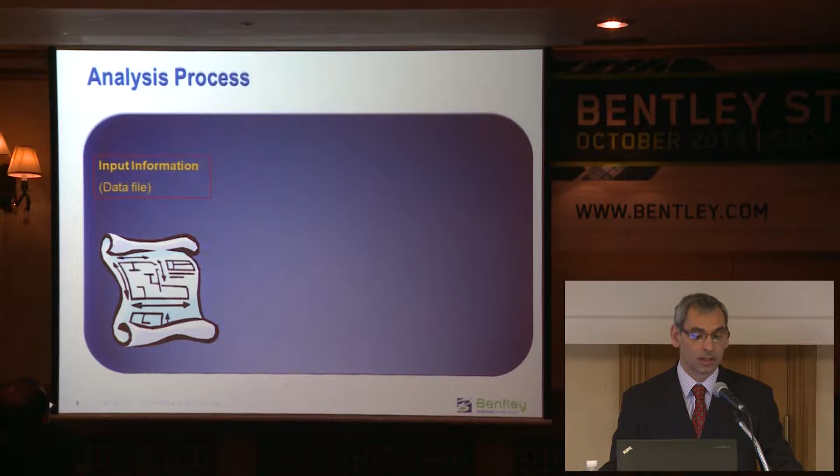So the first part of the process of performing structural analysis is obtaining the data and providing the data in a method that can be passed to an analysis process.

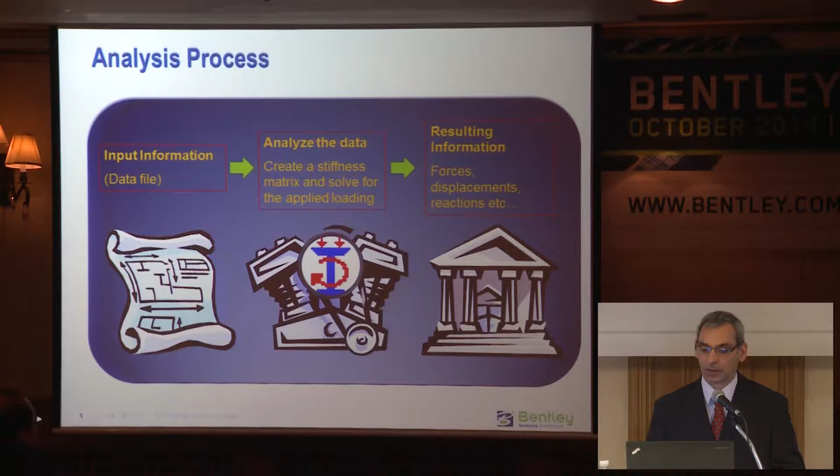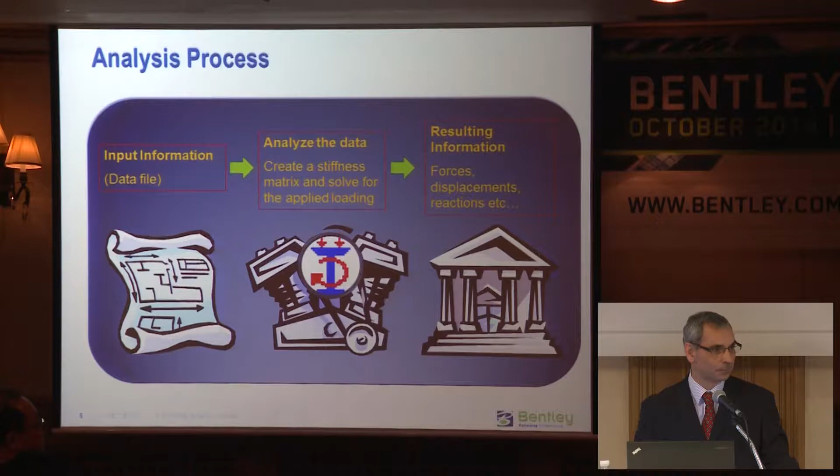With STAAD Pro, we provide this in a very user-friendly graphical interface.

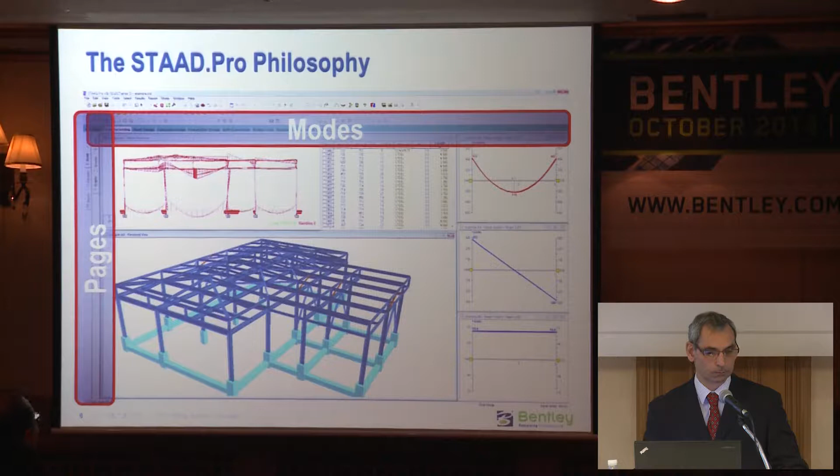However, a majority of our users still make use of the most fundamental part of STAAD Pro.

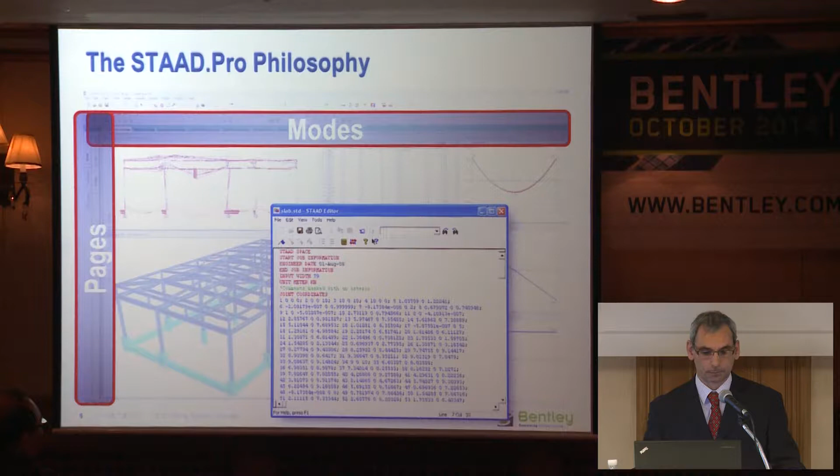However, we know the world is not a simple flow from start to end.

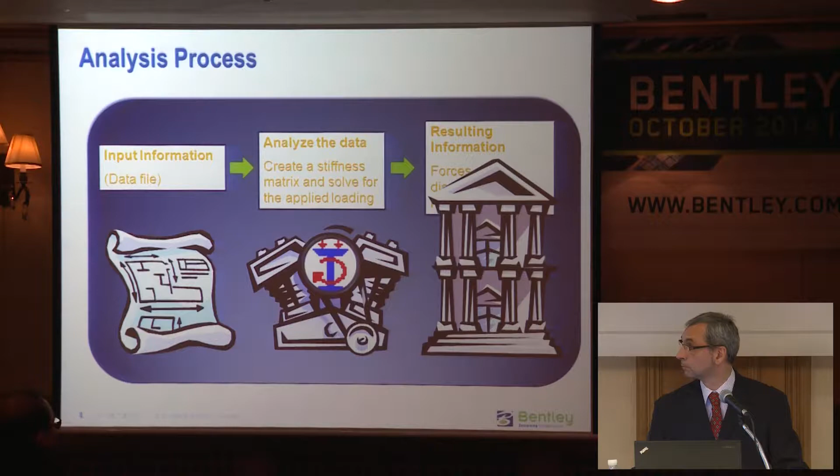In order for you to achieve your requirements, we provide the range of capabilities and entities that are fundamental to creating your models.

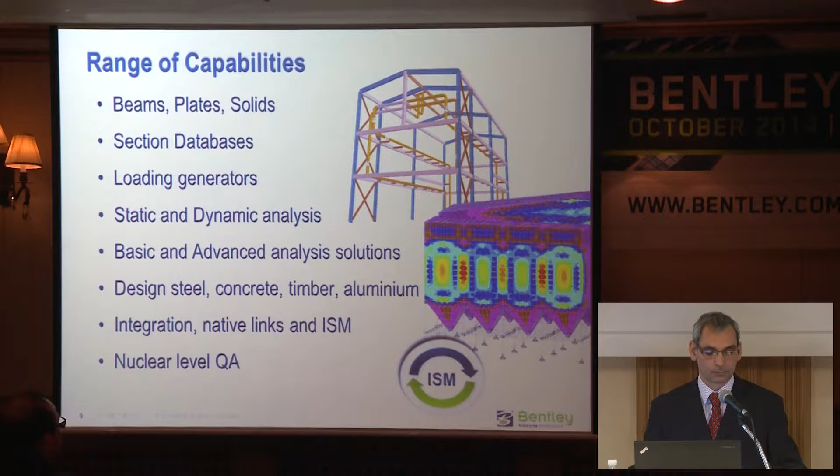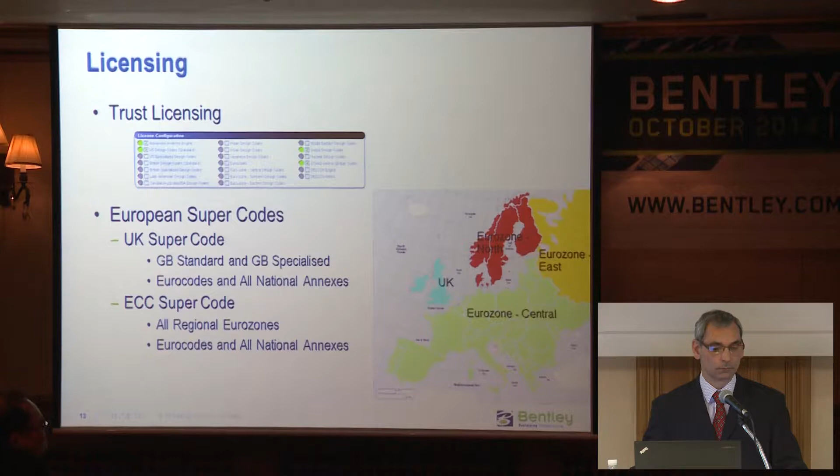This simplifies your requirements before you start the project and means you can be productive as and when you need to be.

So moving on to the technical capabilities that have been delivered with Select Series 5.

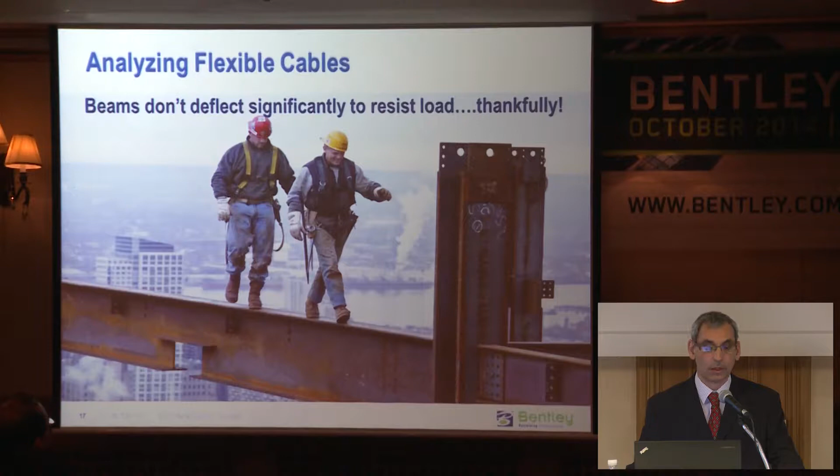However, if we start looking at cables, the structure is becoming more complex.

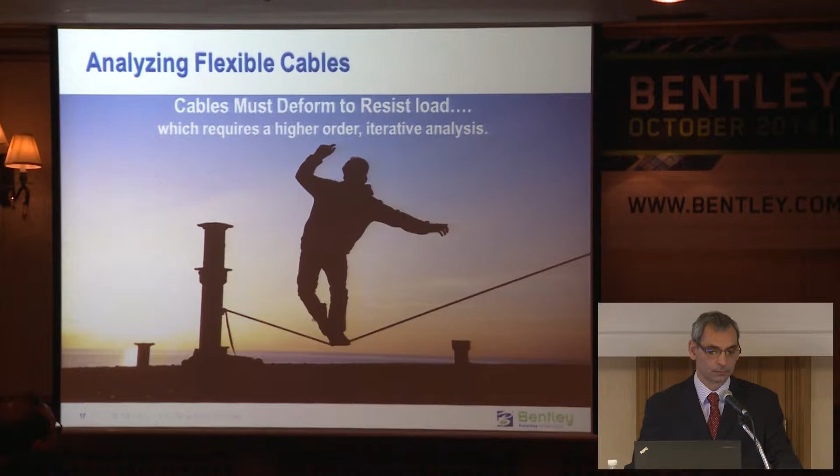We find this in many types of structures now.

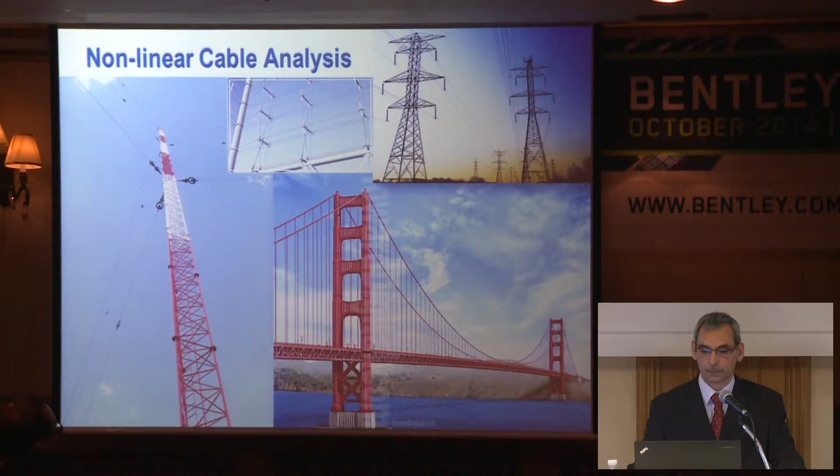All of this is now provided within STAAD Pro by simply identifying your member as a cable member.

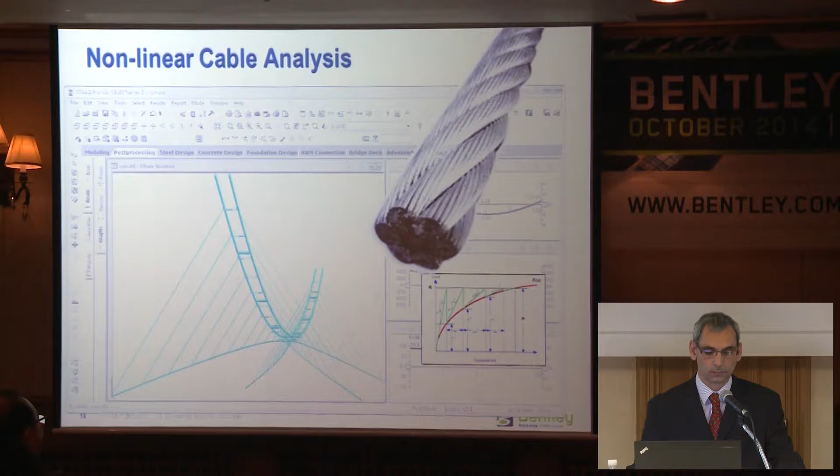Let me give you a simple example.

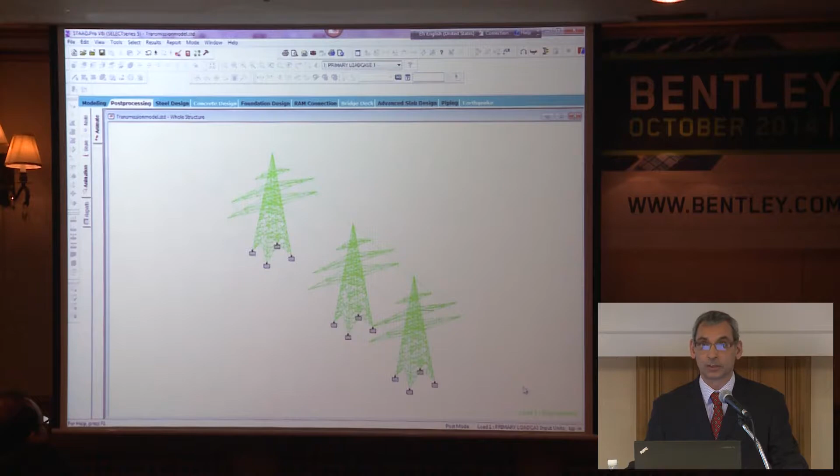But with STAAD Pro's advanced analysis and the cable solution, we can now provide you correct solutions for that type of structure.

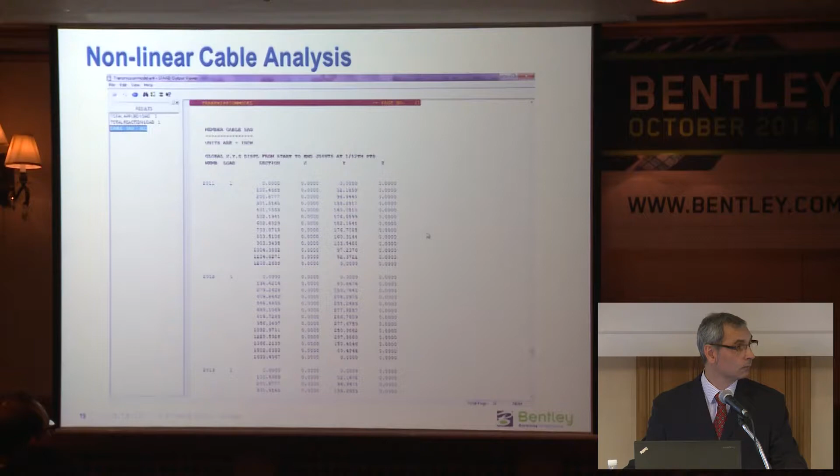So as well in the structural analysis arena, we've introduced the ability to account for missing mass when looking at dynamic time history and steady state analysis methods.

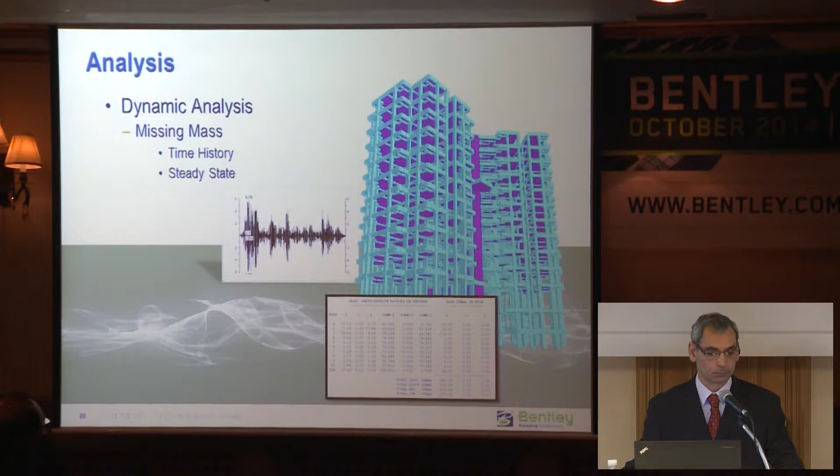Then I come on to talk about the design codes available in the program.

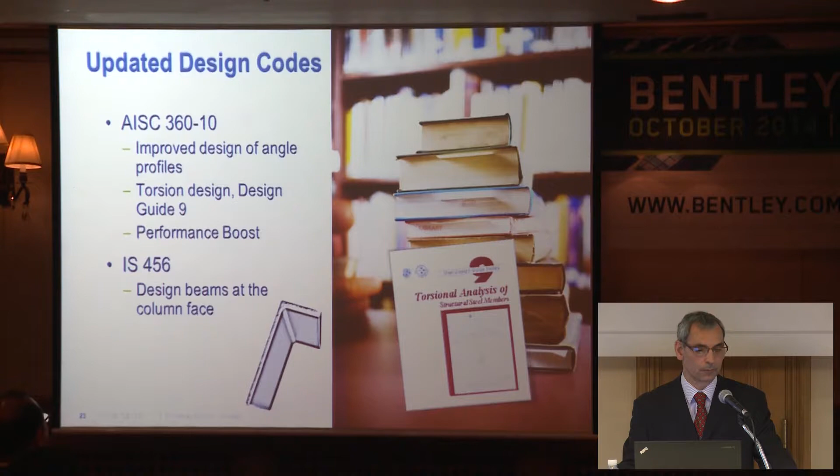So I mentioned earlier about our adoption of the Eurocodes within STAAD Pro. The idea is simple: one code throughout Europe. The challenge is, however, the fact that each country has its own national annex. So at STAAD Pro, we have introduced even more of these national annexes to cover more of Europe.

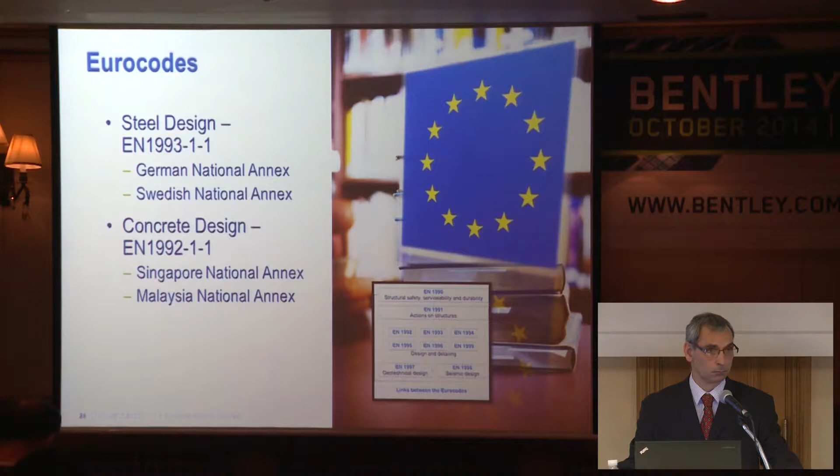So another side of the analysis that has been expanded has been the introduction of more seismic codes. A number of countries have published methods for defining the seismic loading based on an equivalent static method. And here are two more that have been added to those already provided within the program.

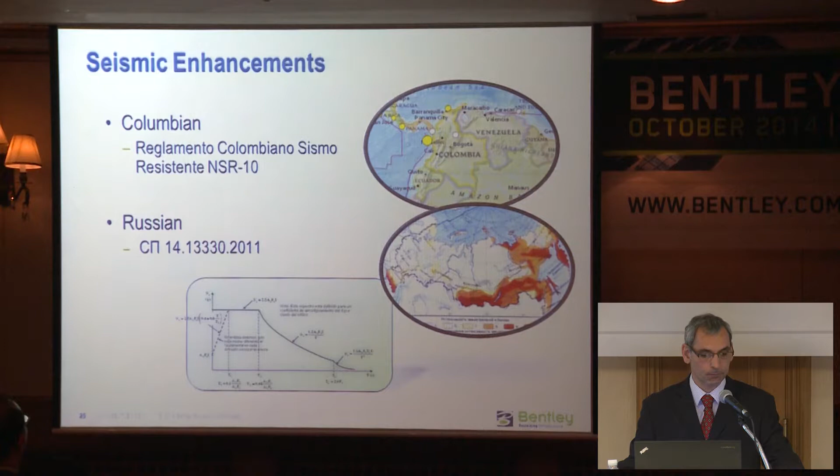So let me now talk about some of the enhancements on our interoperability. The key method for interoperability within the STAAD environment is ISM. This provides you as the engineer the best way of interoperating with your colleagues in different design disciplines.

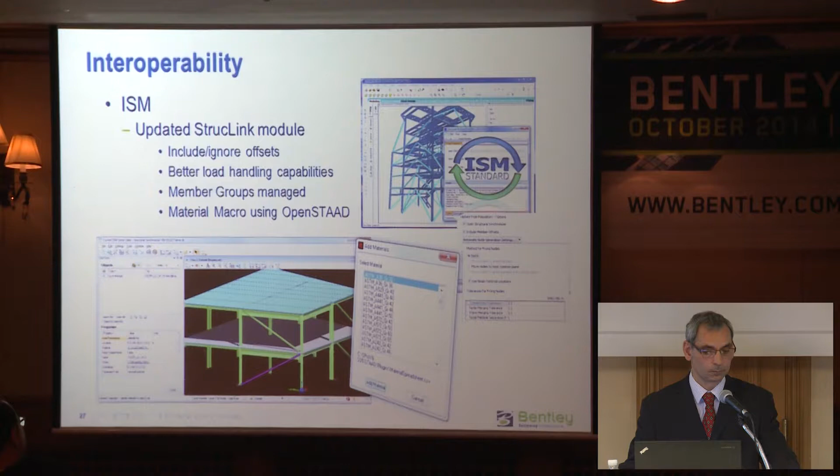STAAD Pro itself provides the basic frame analysis and member design capabilities.

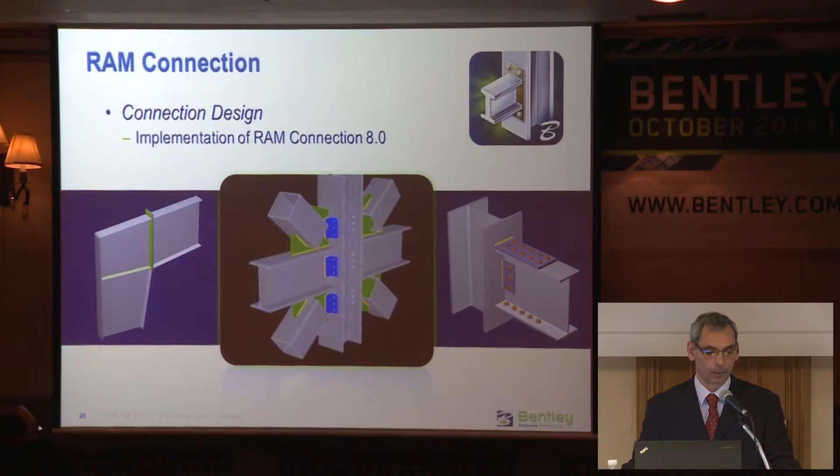So that brings me finally on the Select Series 5 enhancements on the cloud and what we deliver with STAAD Pro SS5.

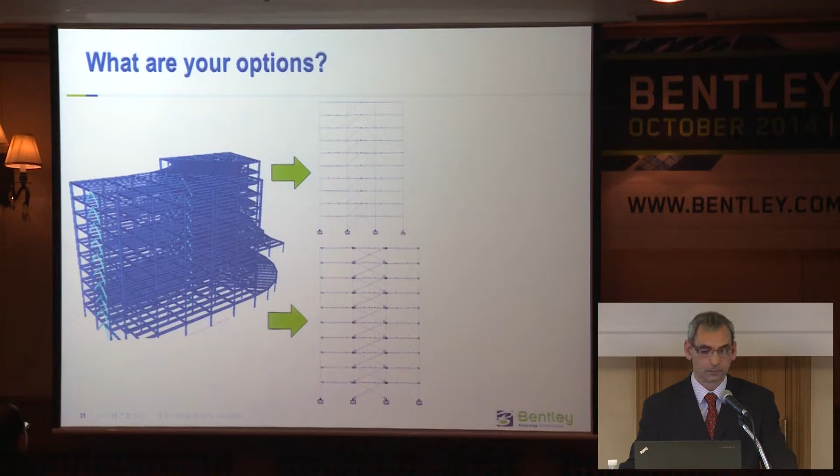And what type of section are you going to use for your bracing members?

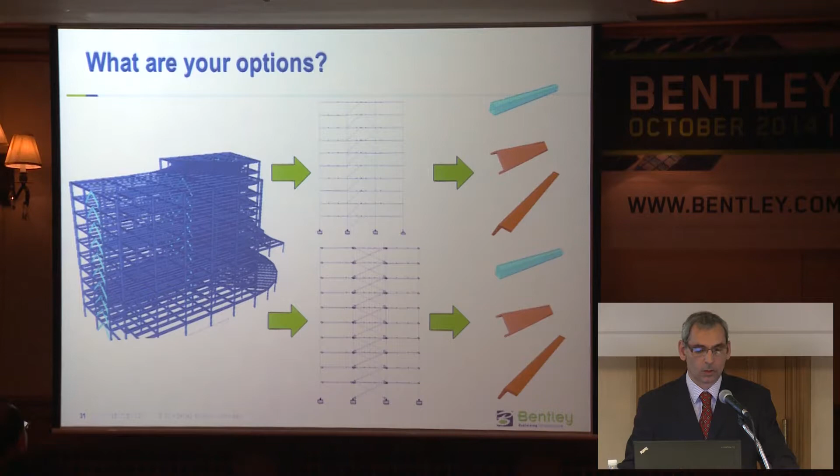All of a sudden, you have 6 choices for something very simple.

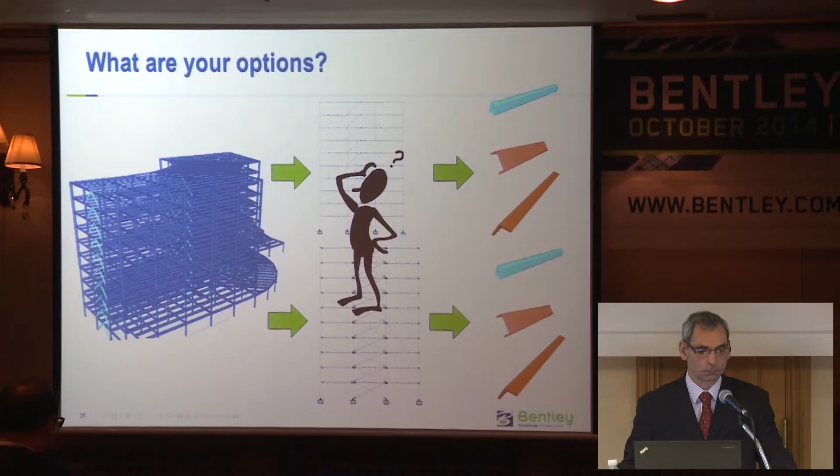We deliver this using our Connect simulation services.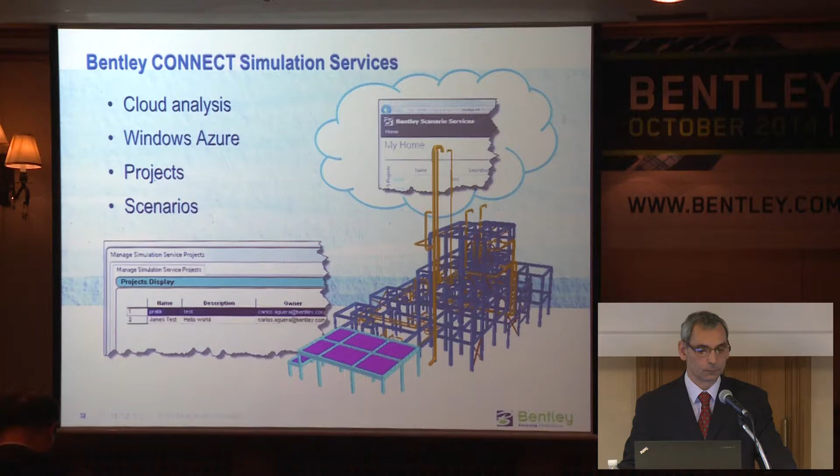Let me give you a simple example. If you were asked as an engineer to provide a tower to support a given gantry, you could come up with any one of these different scenarios.

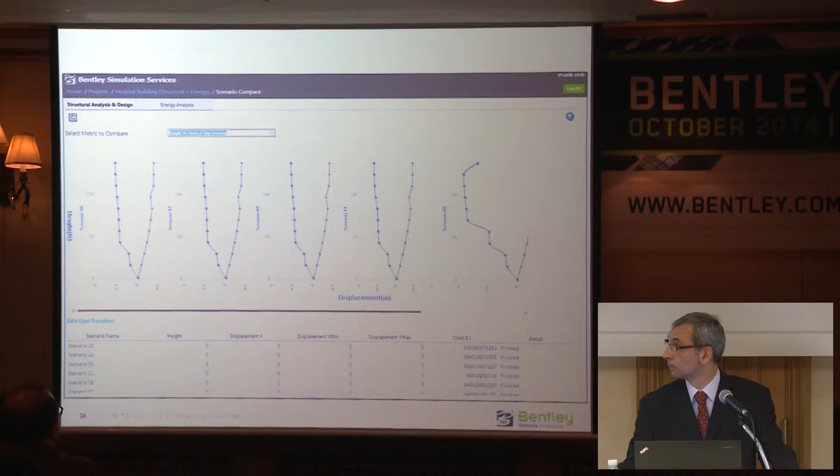And you can construct knowing that you have chosen the best, and that is what we want to provide you.

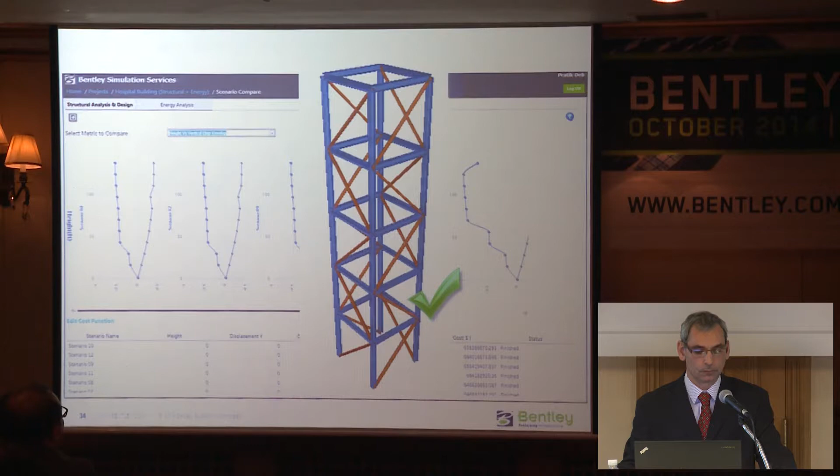So what I've described are the 4 basic themes that went into the development of STAAD Pro Select Series 5.

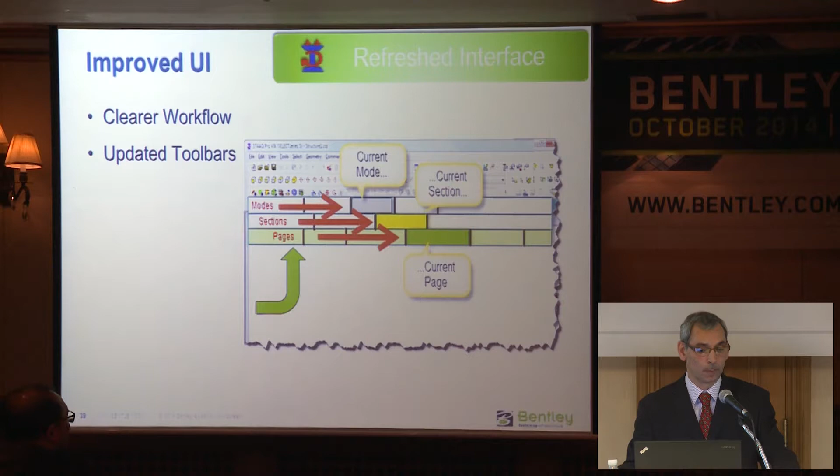I also talked about the editor that is used in STAAD Pro.

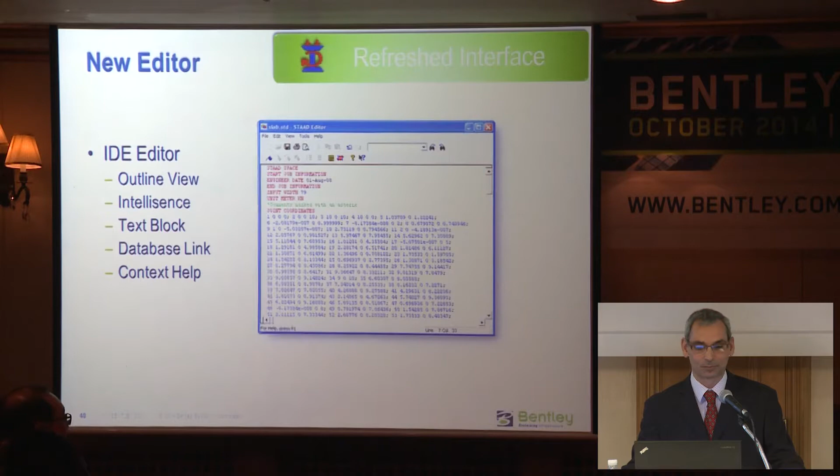This will deliver you an ability to be more productive because we will provide an outline view to get to the data you need very quickly.

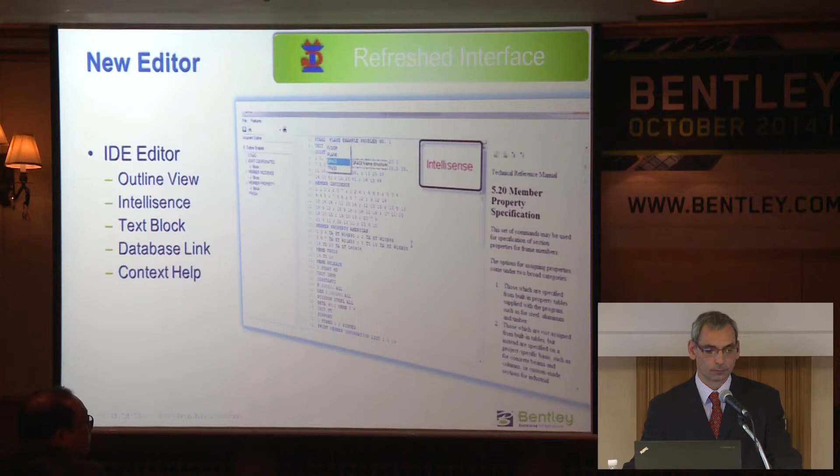We're also introducing a new building mode into the program.

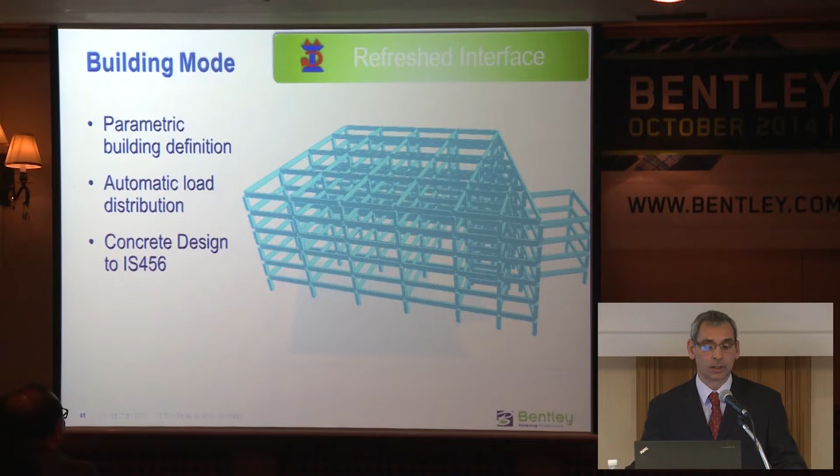We're also further expanding our capabilities within loading and analysis.

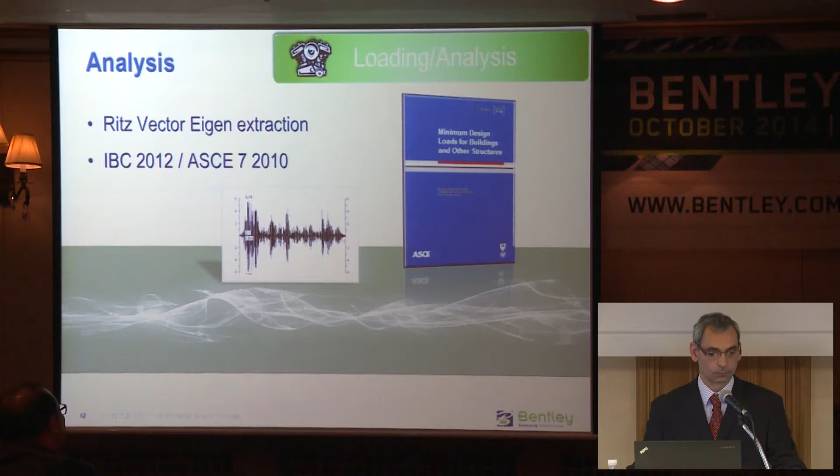So design codes, again, we don't stop with our design codes. Even more are being added.

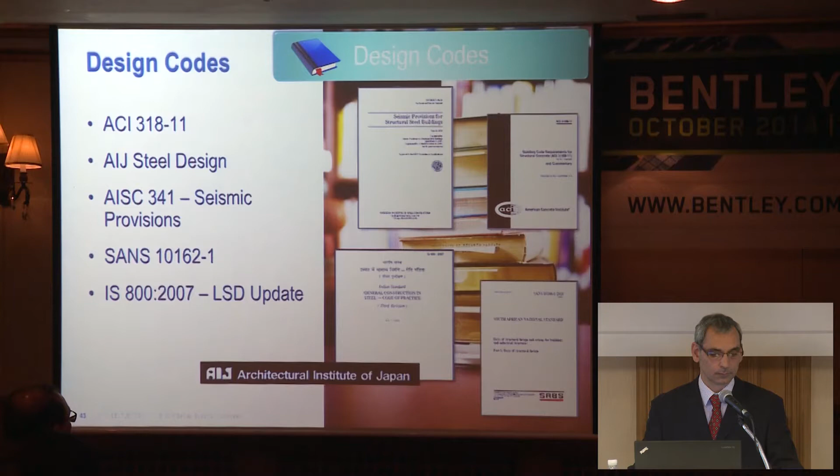So again, the other theme that is important to us and to you is interoperability.

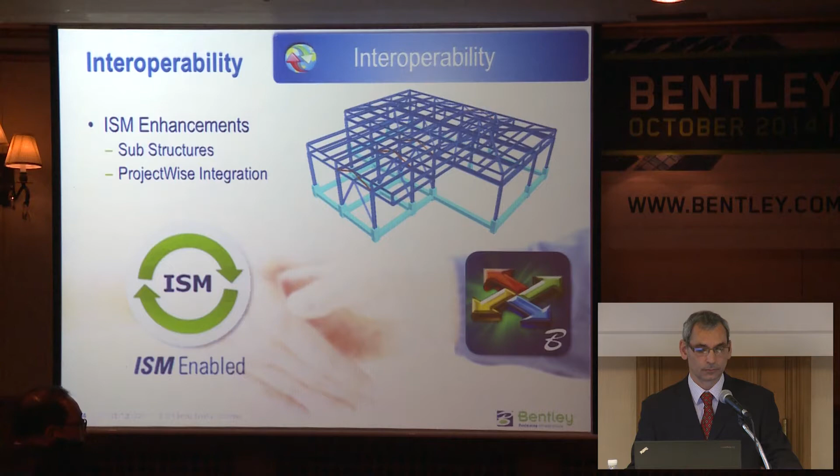So, four great themes that benefit you based on your requirements.

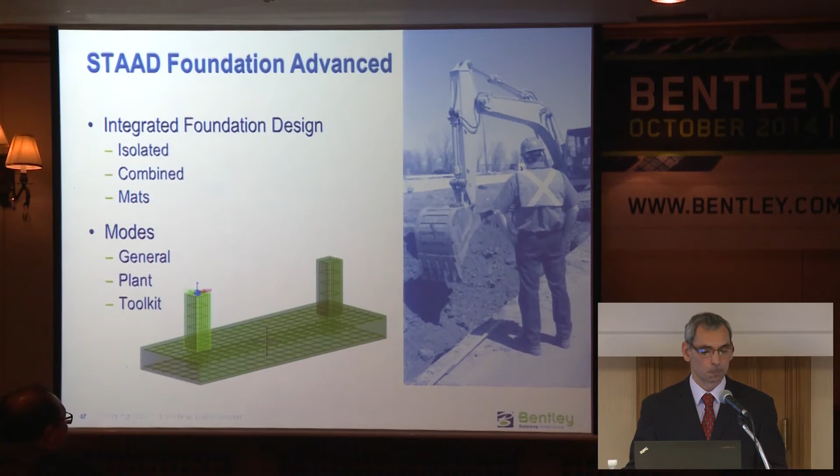The latest version included some major new features, and again, these will be talked about this afternoon.

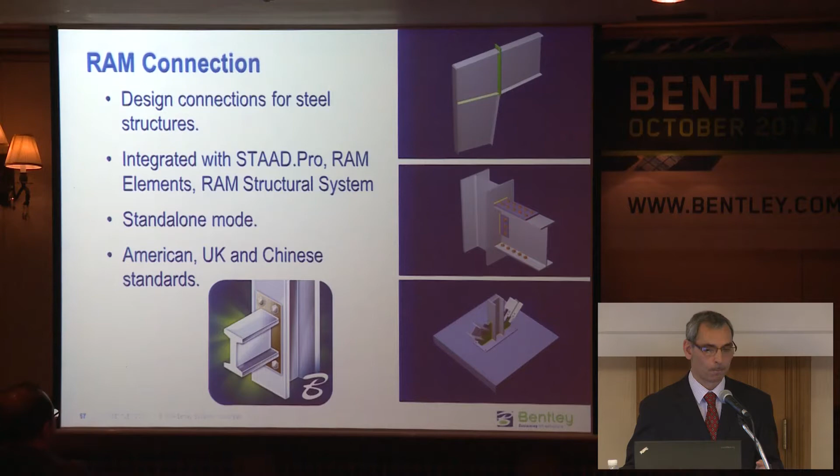With the latest version, you can identify a lot of the changes that have taken place are to enhance the base plate connections.

All of these enhancements make the connection design far more efficient and far quicker.

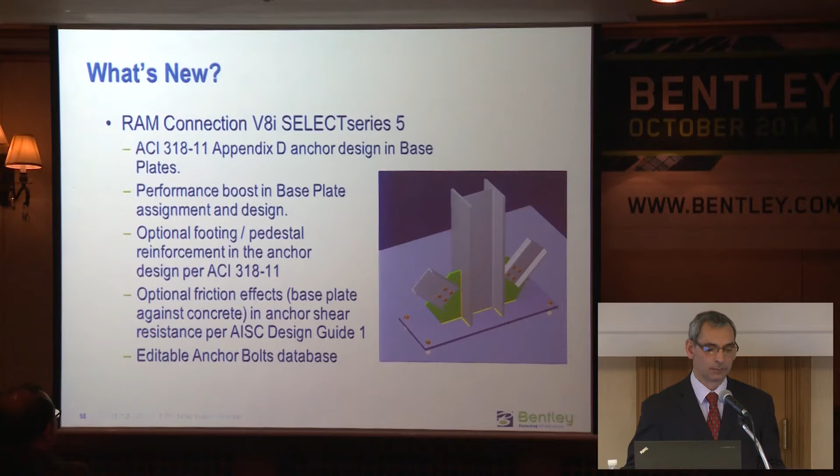One of the most difficult things to do for connection design is the verification, but we deliver a very comprehensive validation document now.

So that's available today. Coming by the end of the year is Eurocode design in Connection version 10.

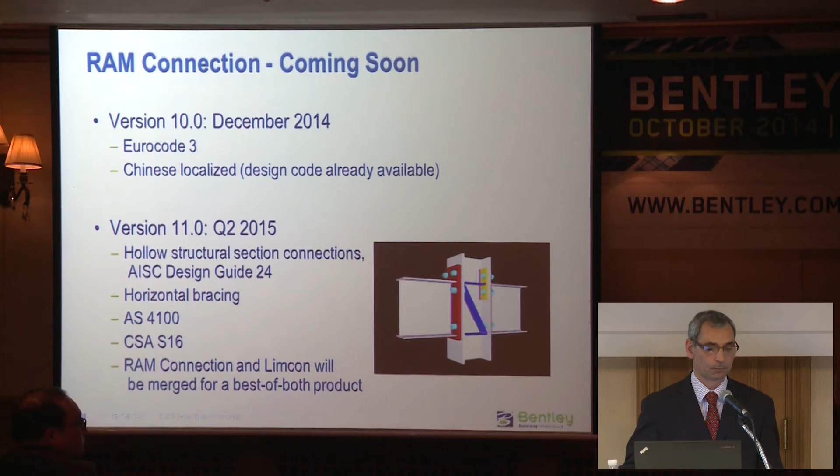Definitely a best of both worlds.

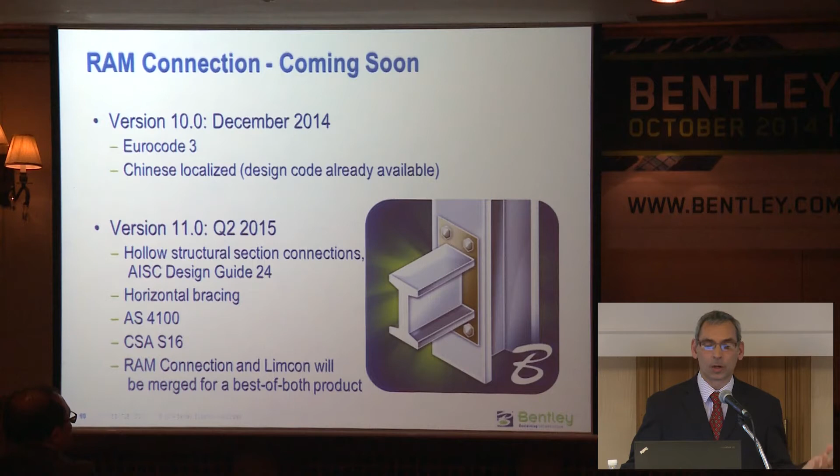So we have been looking at the modules, the programs within the Bentley portfolio that deal with the design.

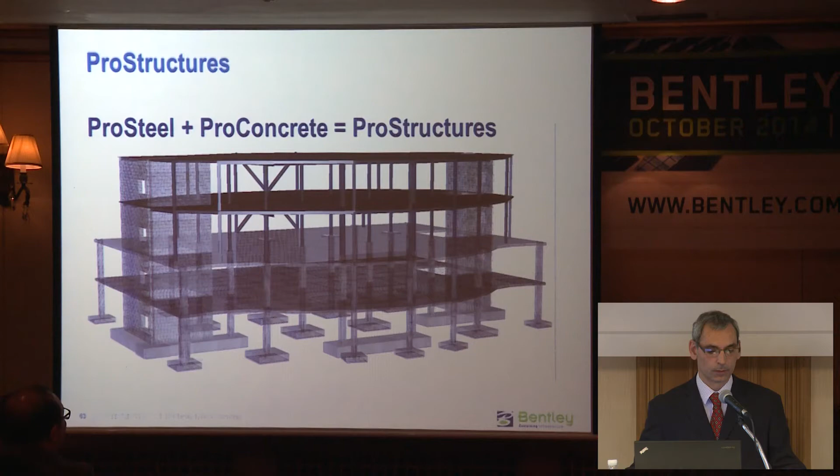So looking at ProSteel, the two major enhancements that have taken place are to do with the anchor design, anchor bolt design, and handrail design.

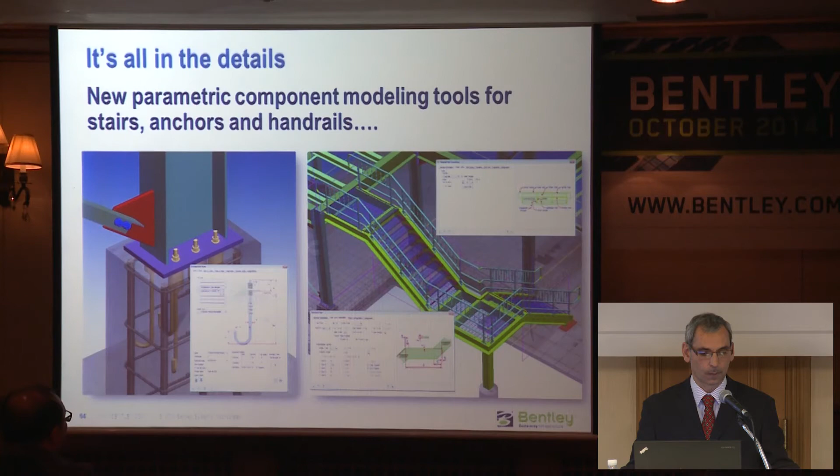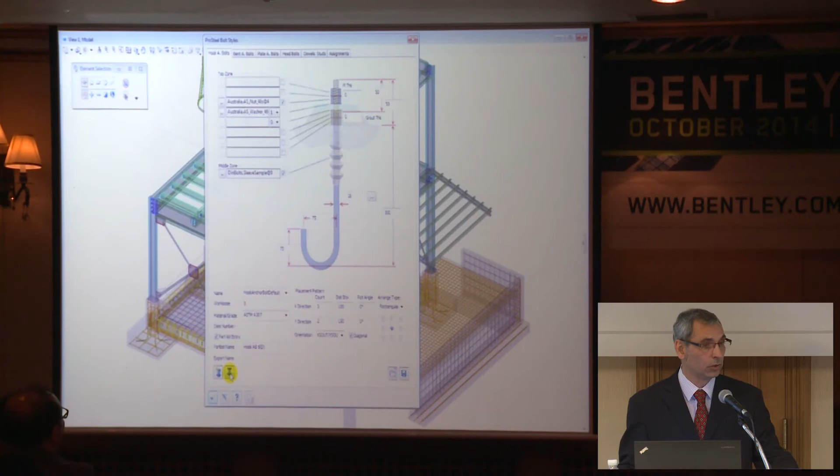Let me show you a simple walkthrough. So here we've got a structure using a simple set of parametric rules. The anchor bolts can be added easily to the base plates as shown.

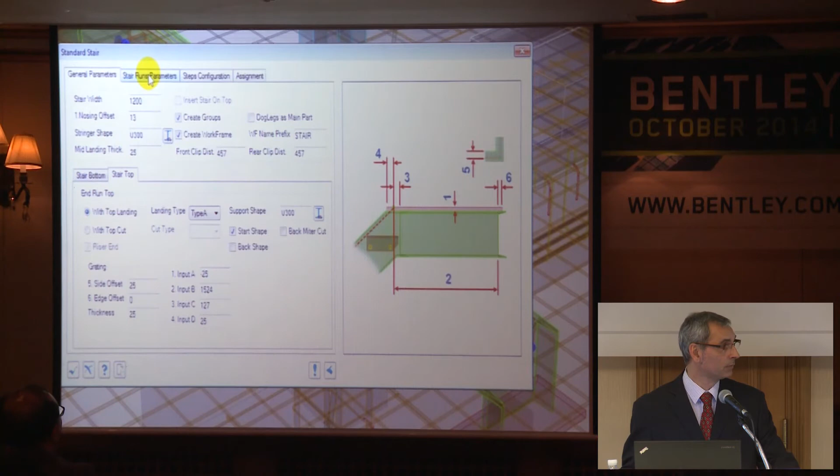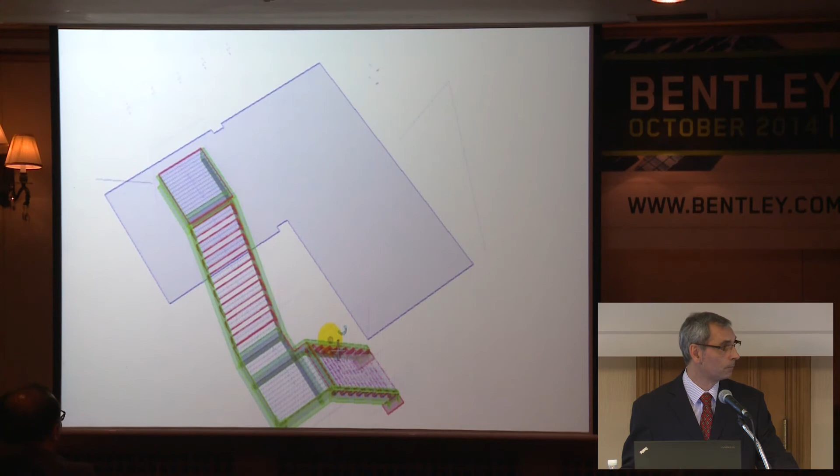So now I just want to show very quickly how easy it is to set up the requirements for a staircase. So parametrically it's defined and created, so any changes can be accommodated maintaining those rules.

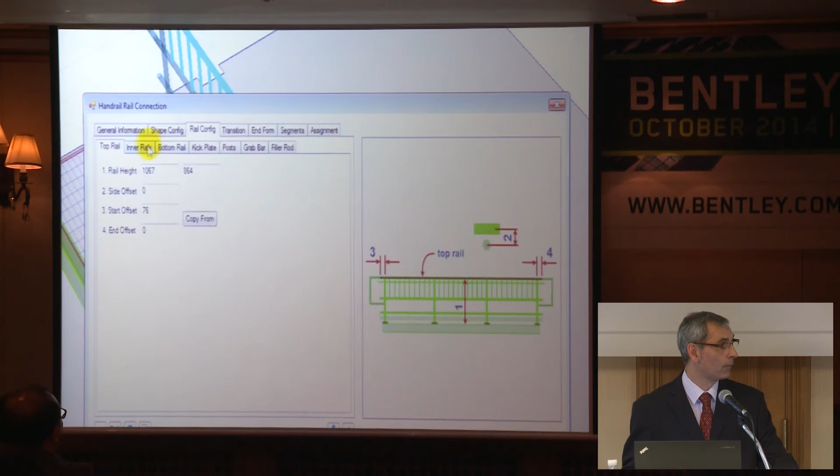Now choosing the components of the staircase, and again choosing some simple parametric rules. The ability to define the most complex handrails can be added very quickly.

So now I want to talk about ProConcrete. The question is, how do you create the most complex of structures?

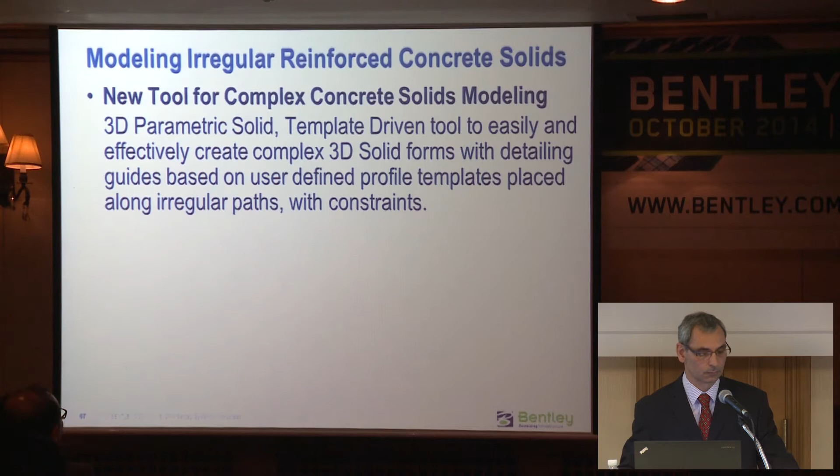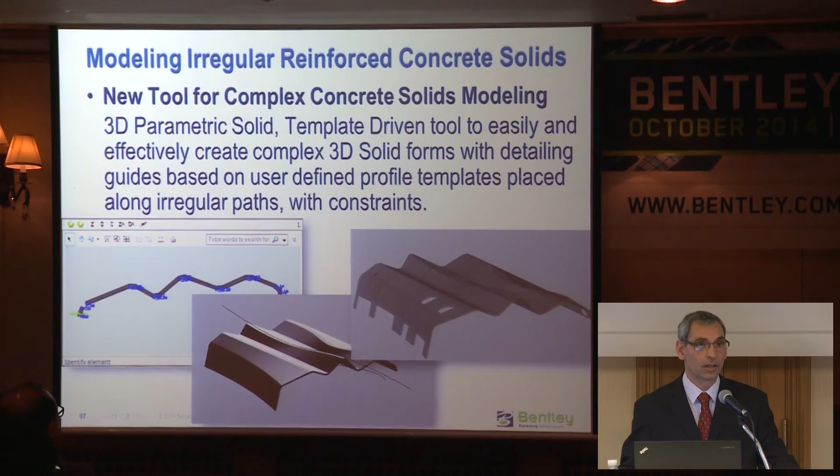Simply follow the rules and the structure becomes very, very clear very quickly. So with such a complex structure, the most important part is to add the reinforcement.

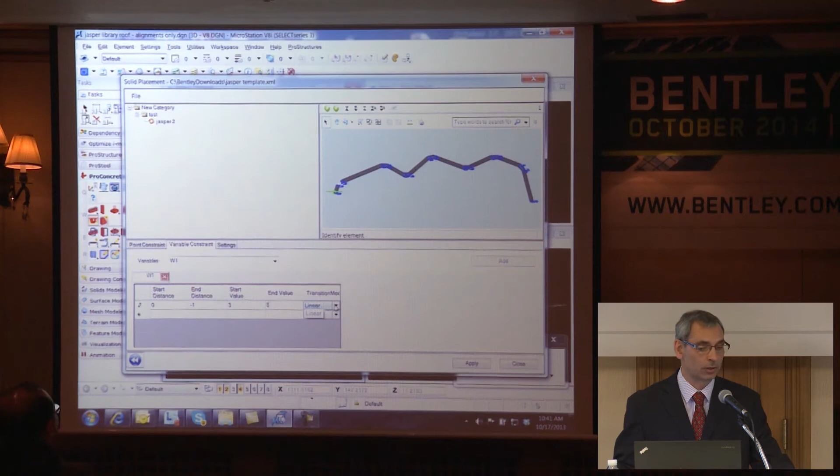So this is a short video that illustrates how one would go about creating the model. Again, simply follow the parametric rules. The structure is created,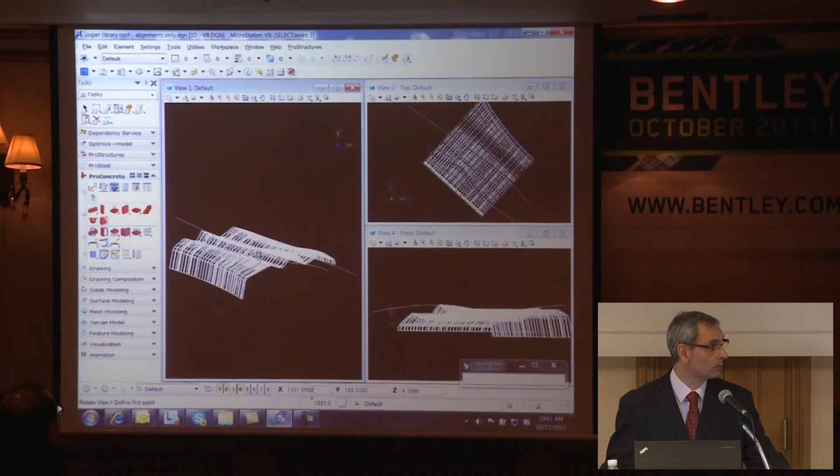and later the solid that is formed from the extraction can be detailed with the rebar following the patterns. So this is not just any structure, this is a real building that was created.

So ProConcrete really does provide power where you have real complexity.

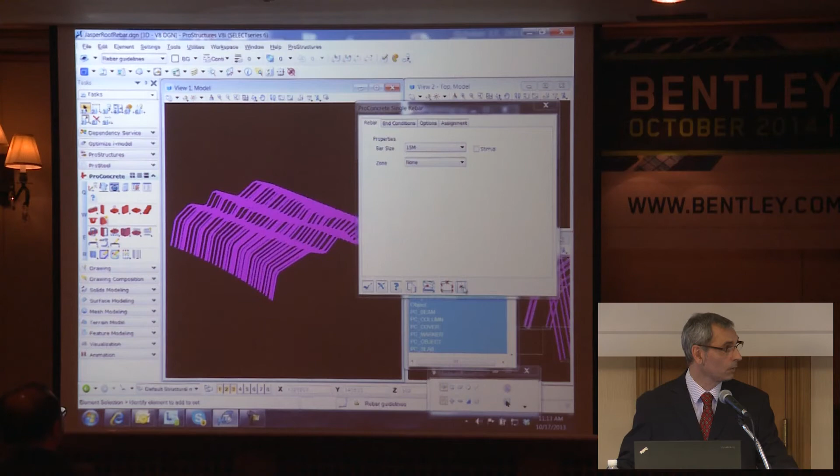Okay, so we've been looking at the programs that are available today.

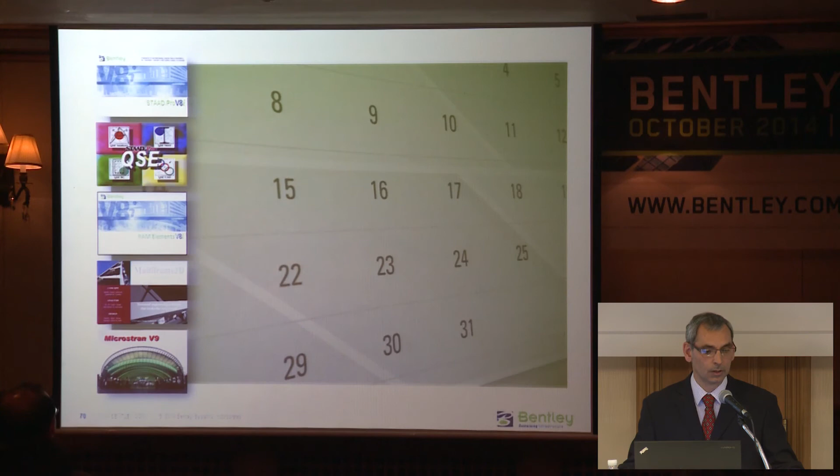So we are bringing them all together into a new application that delivers the best analysis, the best member design, best connection design, and all of the facilities that you require.

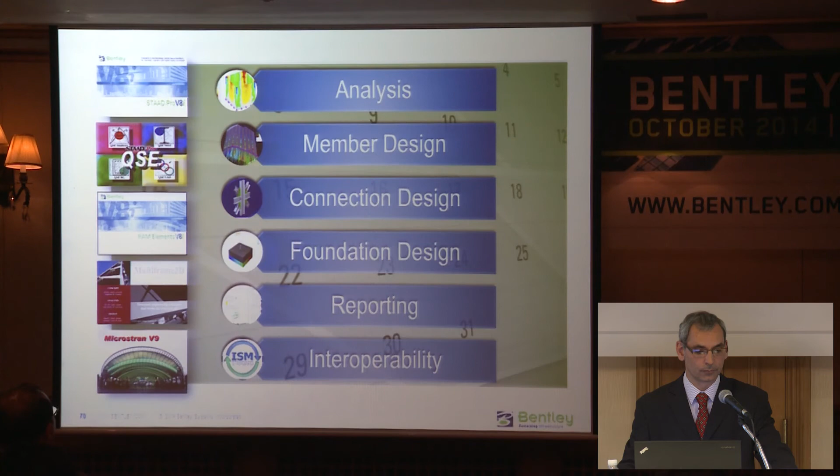In order for us to provide this, we recognize that different organizations have different requirements.

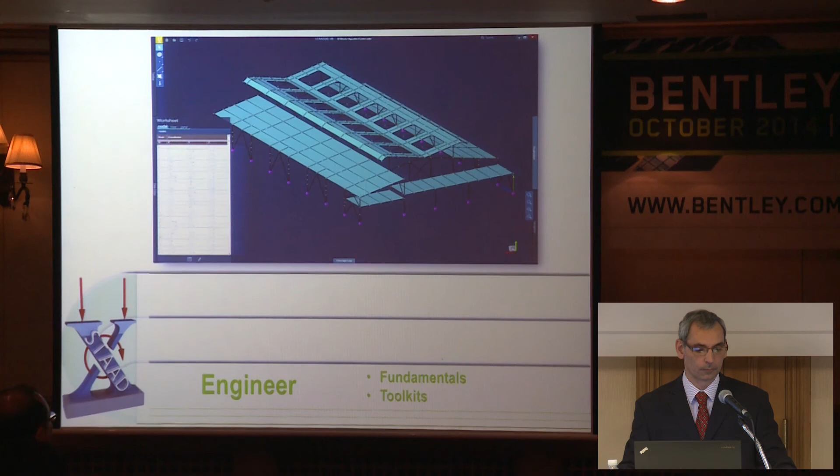Built on top of that will be the professional level.

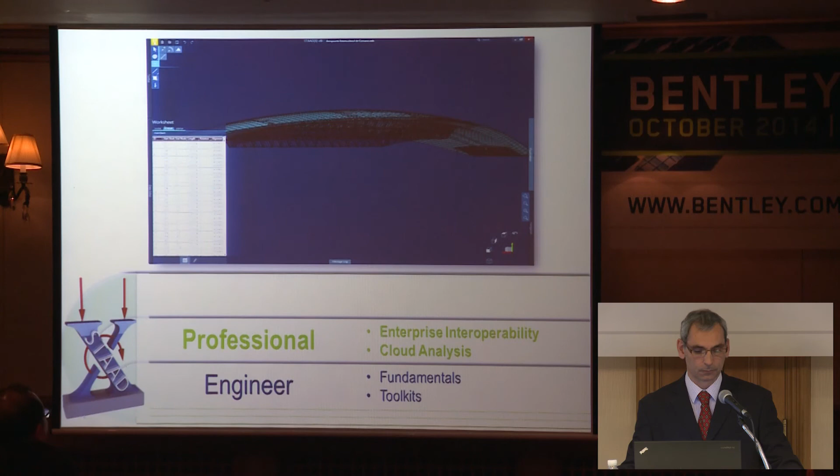And the ultimate version will be provided as the advanced solution.

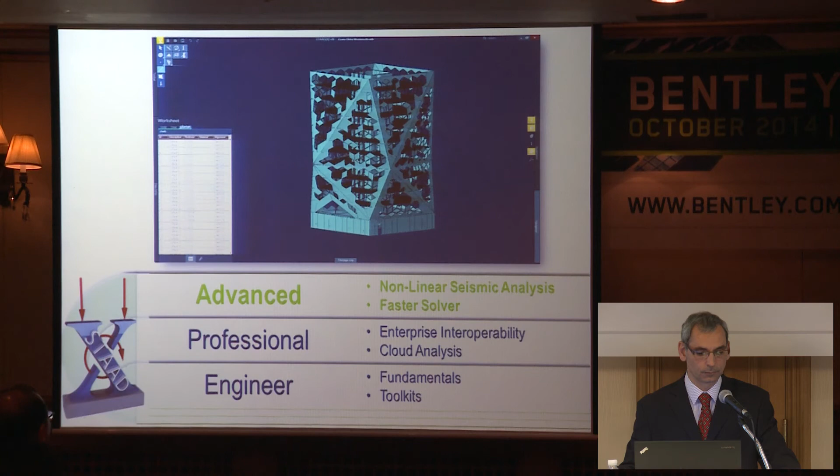You may recognize some of the components that are becoming more common.

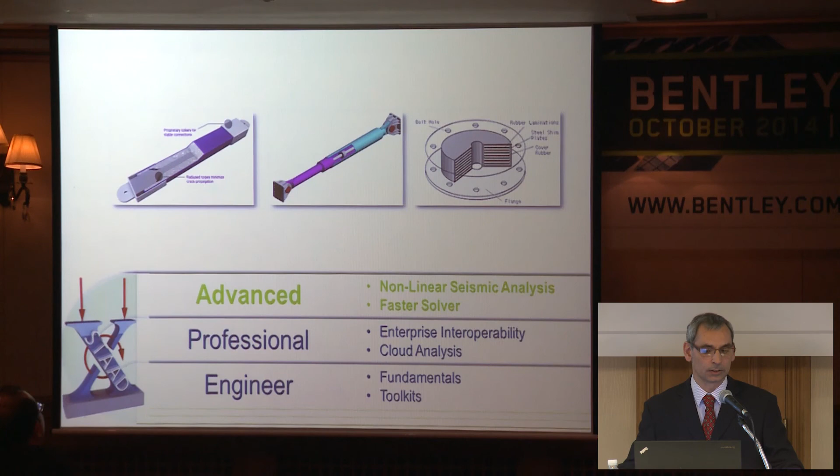So your structures will be as safe as they need to be.

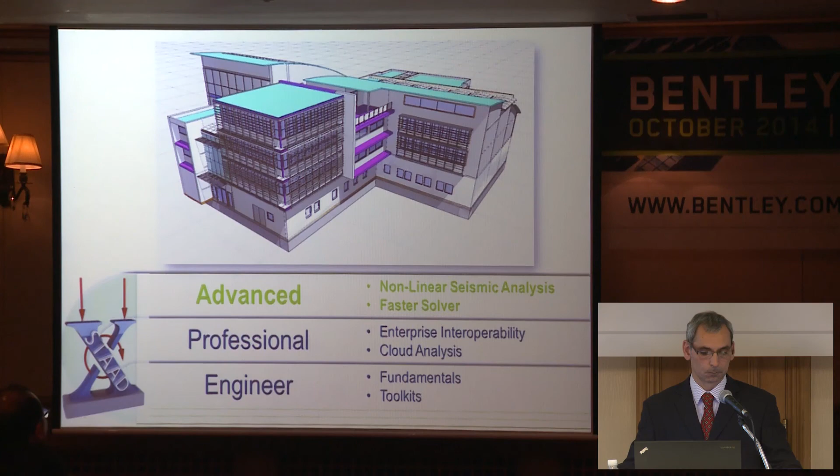All of this is being delivered in a brand new interface.

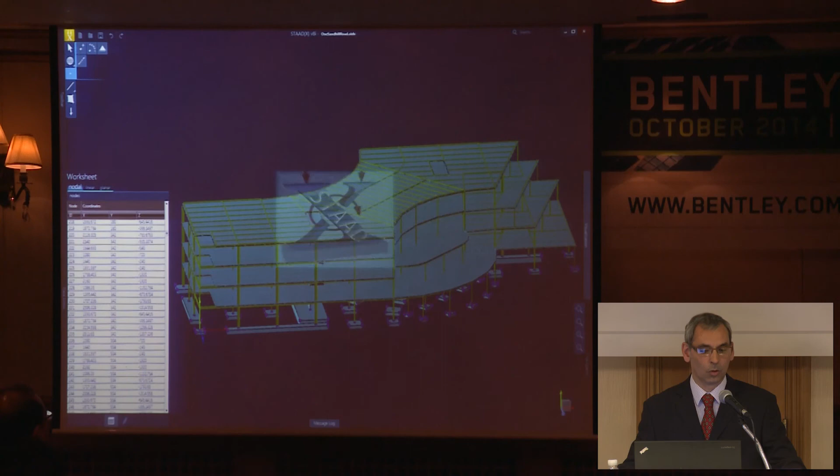All of this will be a single package called STAAD X.

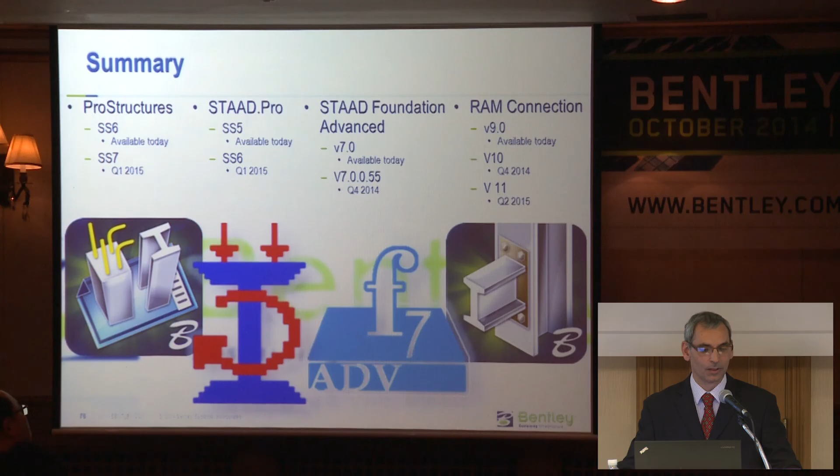And I hope that this has shown you some of the great facilities that you have available today.